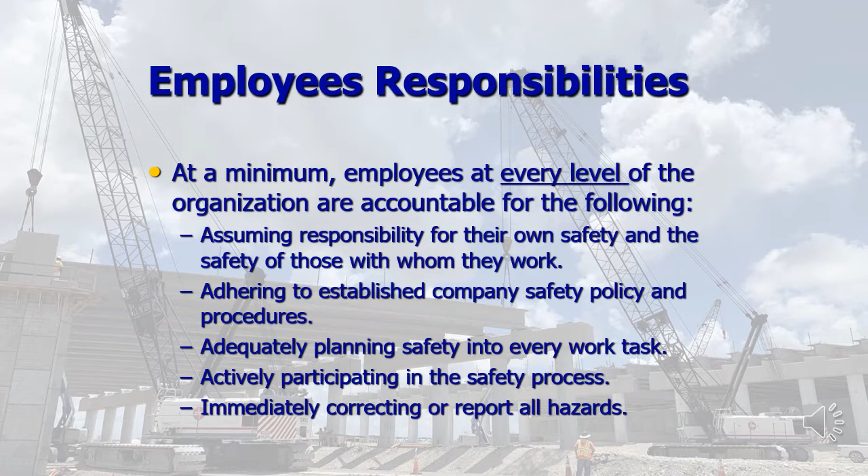More of your safety responsibilities. Number one, who is most responsible for your safety? You are. And how do you achieve this? By knowing and following all of the safety rules, wearing the proper PPE required for a task, and being prepared to come to work each day, both mentally and physically.

Who else are you responsible for? Can you come up with any other reasons? You are also responsible for your coworkers' safety. Stop unsafe acts while they are happening. Don't wait. If you see something, say something. Remind people to comply with safety rules. Be another set of eyes and ears to help prevent an accident.

You must report any injury or illness, no matter how minor, immediately to your supervisor. Your report will also help us to identify and correct hazards that will prevent injuries to others in the future as well.

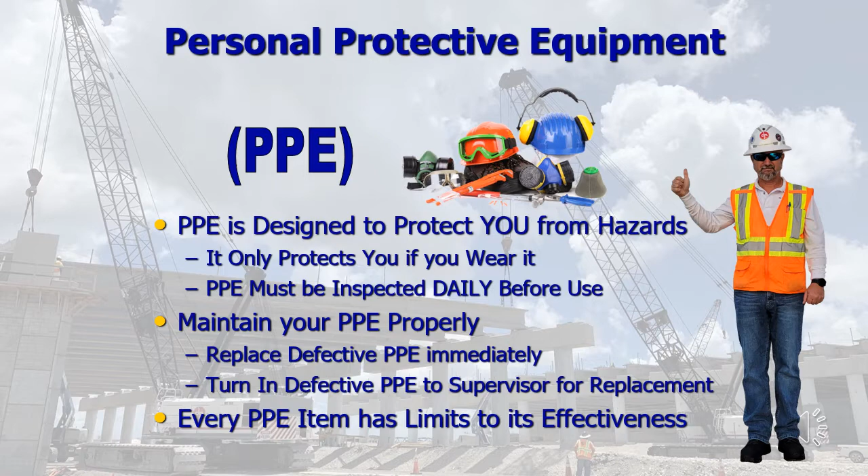Personal protective equipment, or PPE, is designed to protect you from hazards. It only protects you if you wear it. It must be inspected daily before each use, and it must be maintained properly. Replace defective PPE immediately. Turn in that defective PPE to your supervisor for a replacement. Every PPE item has a limit to its effectiveness.

Hard hats must be worn properly. The Asphalt Group logo should face the front. The inner suspension should be in place. The ratchet should work perfectly. No hats should be worn underneath, and do not paint or draw on the outer shell. Inspect your hard hat daily. Check it for cracks or defects. Make sure the suspension functions correctly. If it needs to be replaced, talk to your supervisor.

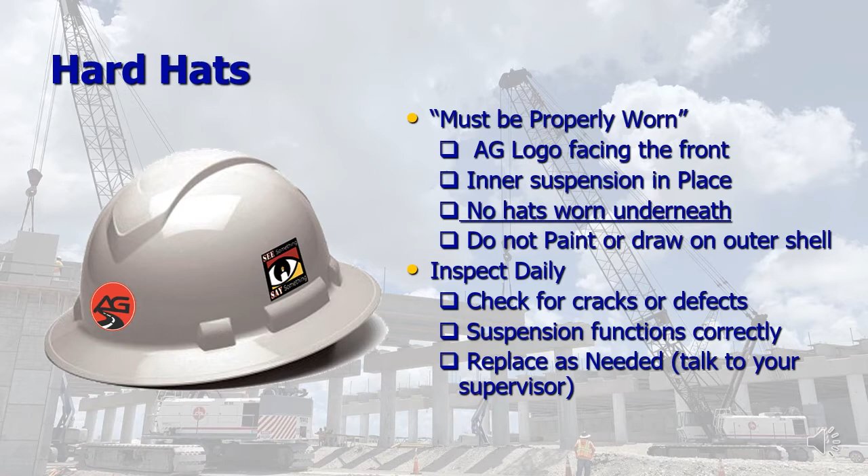Vests are required on all projects and job sites. Class 2 retroreflective clothing is required by all project employees and subcontractors. Class 2 shirts are also acceptable. A Class 3 vest is required for all personnel performing nighttime operations such as asphalt paving and MOT when working near traffic.

Inspect daily. Replace if worn out or if too dirty to be visible. Exchange your worn vest for a new one. This policy includes contractors that are working on the job sites as well.

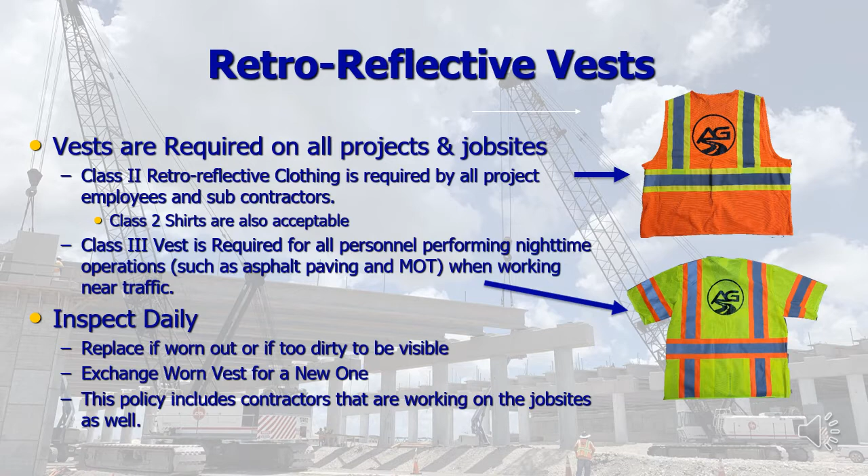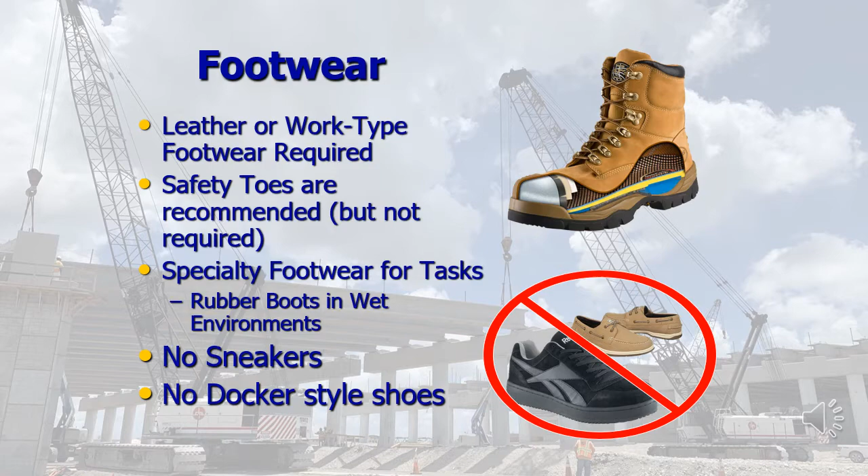Footwear: leather or work-type footwear is required at all times. Safety toes are recommended, but not required. Specialty footwear for tasks might be rubber boots, for example, in a wet environment. No sneakers or Docker-style shoes are allowed by our employees or by subcontractors. Only leather or work-type footwear should be used at any time while on the project.

Eye protection: your safety glasses must meet ANSI Z87.1 standards. That standard is for impact protection. These glasses provide protection against flying objects, light radiation, and dust. Face shields are required for all grinding, welding, machining, cutting, chipping, and spray operations, or any other specific activity where there is an increased risk for eye and/or face injury. You may also need shade 4 or shade 5 cutting glasses or goggles when cutting with an acetylene torch rig.

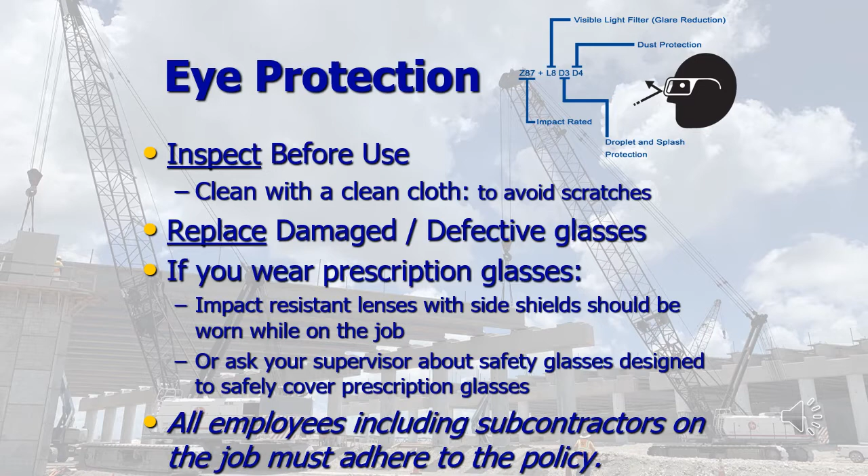Hand protection. Your hands are your most valuable asset. It is of the utmost importance to protect that asset on the job. Basic leather-palmed work gloves or rubber-palmed gloves will be provided to every employee when hired.

Employees will be provided additional protective gloves based on the identified hazards as needed. Those gloves would be the type like anti-vibration while chipping, cut-resistant while using knives, chemical-resistant while using chemicals, or welding gloves when welding or cutting with an oxyacetylene torch.

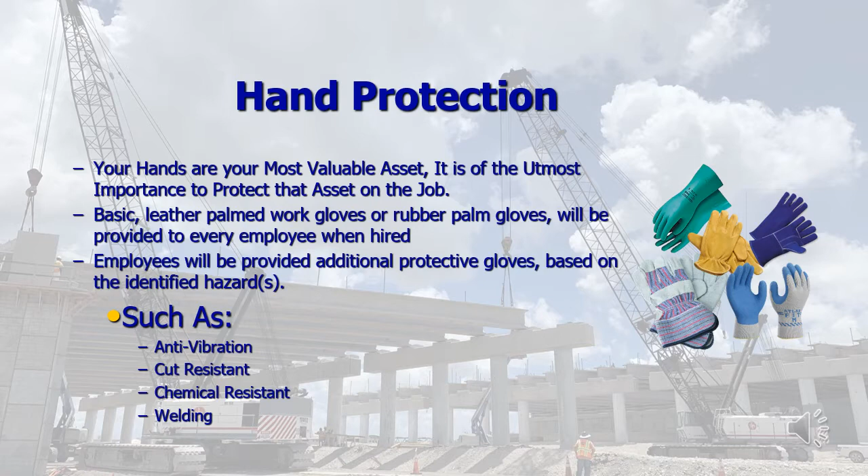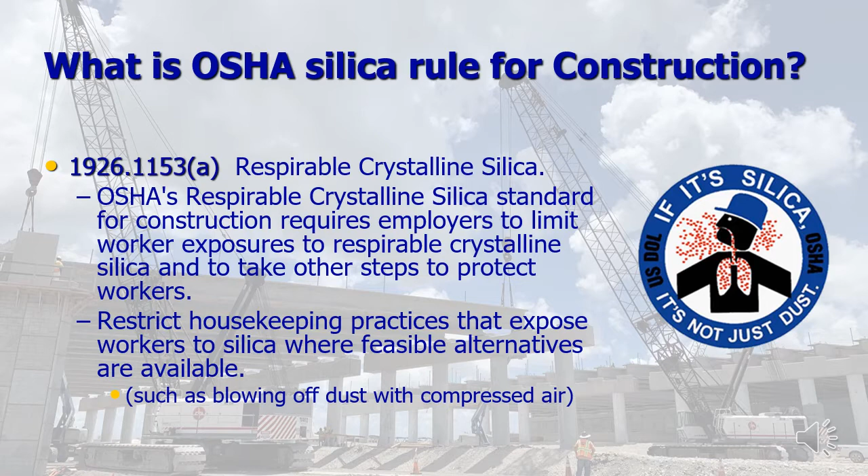What is OSHA's silica rule for construction? 1926.1153A talks about construction requiring employers to limit worker exposures to respirable crystalline silica and to take other steps to protect workers. It helps to restrict housekeeping practices that expose workers to silica where feasible alternatives are available, such as blowing off dust with compressed air.

What is silica? Silica is one of the most common minerals in the Earth's crust. Glass, beach sand, silicone, and granite are all silica materials. There are two forms of silica, crystalline and non-crystalline. Crystalline silica is a bigger worry for the health of our lungs. When we talk about silica exposure, we are talking about crystalline silica or quartz.

Construction workers could be exposed to silica when cutting, grinding, drilling, sanding, mixing, or demolishing materials containing silica. The size of the airborne particles determines the amount of the risk. Smaller particles can be inhaled deep into the lungs where they can cause damage. Larger particles such as beach sand are not as great a concern because they are too large to inhale.

What happens if you are exposed to too much silica? Breathing silica deep into the lungs can cause silicosis. With silicosis, silica particles lodge in the lung tissue, causing scarring. The lungs become less flexible, making it difficult to breathe and do work hard. Once silicosis develops, the damage is permanent and there is no recovery.

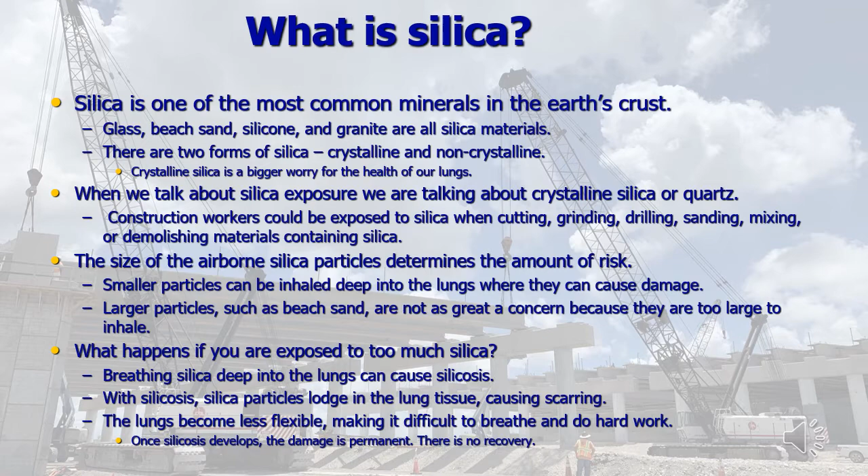How do we control exposure? Overall, this OSHA rule calls for employers to reduce employee exposure to silica and dictates the procedures employers should follow, such as engineering controls, using dust suppression, water truck use on the roadways, using water while cutting asphalt or concrete, and administrative controls, which is training in silica and training in the exposure levels.

Respirators are only used as a last resort. They should never be used instead of dust control. Voluntary usage is an option for nuisance dust as well, and it requires no medical training or fit testing.

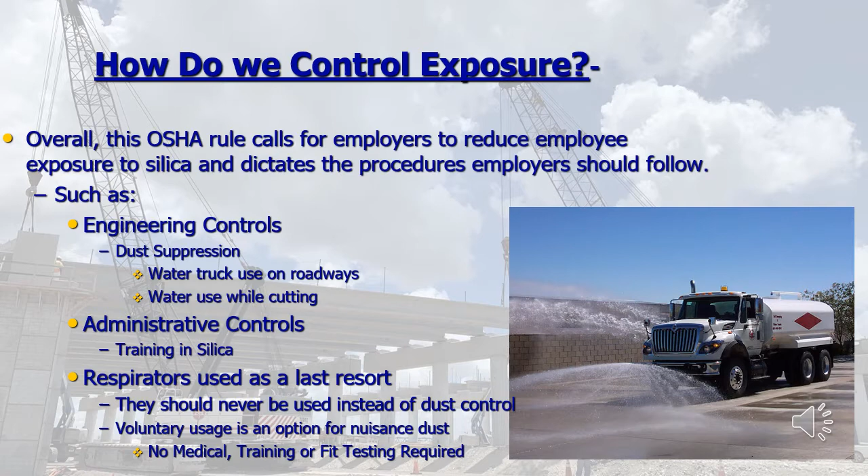Examples of tasks that would require respiratory protection measures would be cutting asphalt or concrete with a handheld or walk-behind saw, operating a broom or broom tractor without a cab, sandblasting operations, and baghouse and drum maintenance in asphalt plants. Remember, water suppression is key.

Company policy requires utilizing water to keep the dust levels to a minimum, therefore not requiring a respirator. Remember, no dust equals no need for a respirator. This one slide says it all.

Hearing protection. Always use earplugs or earmuffs when working around noisy equipment or tools in the field. Insert them properly. Keep them clean. Never insert earplugs into your ears with dirty fingers. Use caution when wearing hearing protection around traffic or equipment because you want to be able to hear the things around you. And always replace dirty or worn hearing protection.

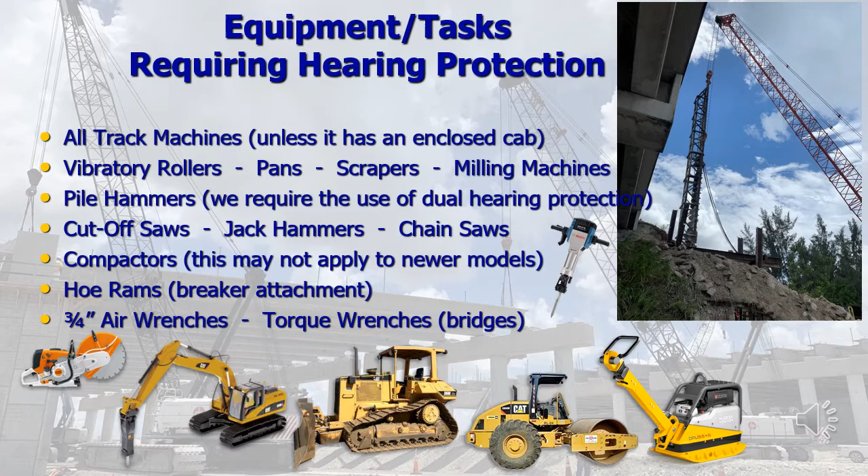Let's look at some examples of tasks that require hearing protection. All tracked machines, unless it has an enclosed cab. Vibratory rollers, pans, scrapers, milling machines. Pile hammers, where we require the use of dual hearing protection, meaning that you need both earplugs and ear muffs. Cutoff saws, jackhammers, chainsaws, compactors, hoe rams, otherwise known as the breaker attachments, 3/4 inch air wrenches or torque wrenches that are used sometimes on steel bridges. All of these things require hearing protection.

Some other miscellaneous PPE or personal protective equipment would be chainsaw chaps whenever using a chainsaw, which are designed to bind up the chainsaw in the event that the chainsaw blade made contact with the chainsaw chaps. Toe caps, if the visitors were to be exposed to any toe hazards while on the job site, for example. Welding sleeves when welding, or the green welding shirt.

Make sure you use the PPE properly and inspect it before each use. How are your PPE requirements communicated to you every day? By the daily job plan or the safety meeting that you have with your crew every morning.

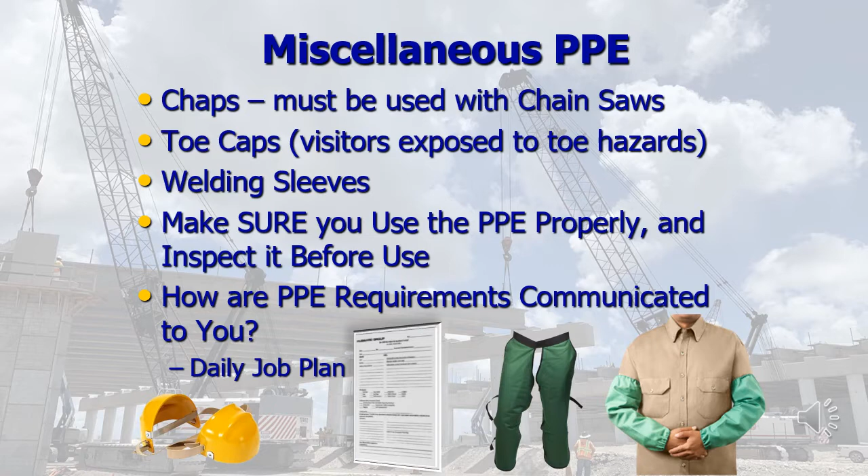Do's and don'ts of operating hand and power tools. Do inspect tools and equipment before each use. Check extension cords for any cuts, broken ground prongs, or exposed wires. Keep tools clean and stored properly. Always use the right tool for the job. Wear the correct PPE for the tool as required per policy.

Don't ever use defective tools or equipment. Don't leave power cords lying in water. Don't set circular saw blades down on their own power cords. You'd be surprised how many others have done this in the past. Don't operate tools or equipment unless you are experienced or have been trained in their use.

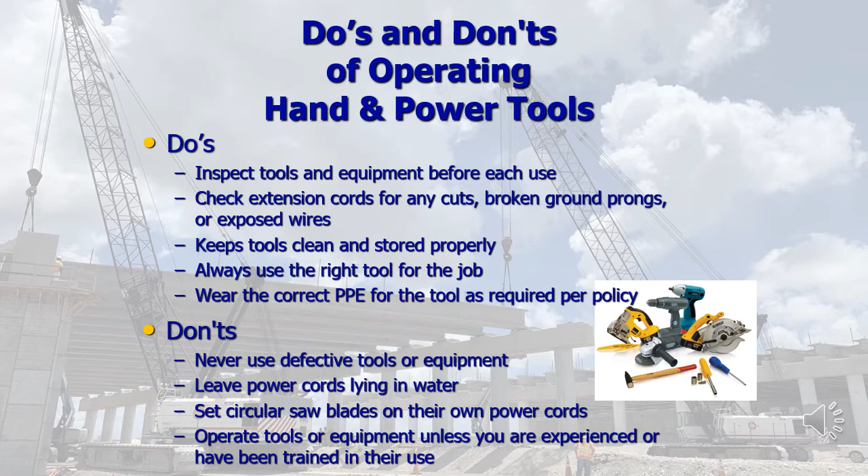Addressing safety concerns. If you feel a task or procedure is unsafe, the first thing you need to do is speak to your supervisor. If the issue is not resolved, bring the issue to the superintendent. If the issue remains unresolved still, contact your project manager immediately. If no action occurs, contact safety. You got to speak up for safety. Remember, if you see something, you must say something.

Near misses. What is a near miss? It's an unplanned event that did not result in an injury, illness, or damage, but had the potential to do so. Only a fortunate break in the chain of events prevented an injury, fatality, or damage. A faulty process or management system is typically the root cause for the increased risk that leads to the near miss and should be the focus of improvement.

Other familiar terms for these events: close call, narrow escape, near collision, near hit. Remember, report all near misses to your supervisor every day. What you see, what almost happened, could prevent someone from getting hurt in the future.

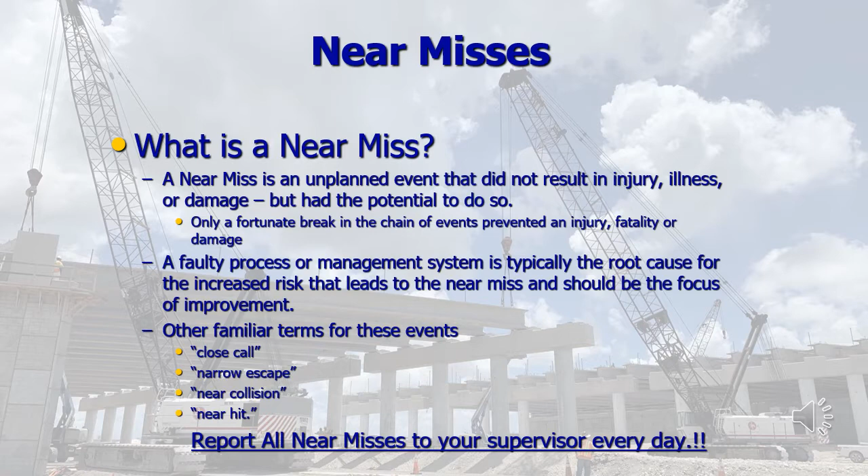Cell phones and texting. Use of a cellular telephone during working hours is prohibited. Texting is also prohibited.

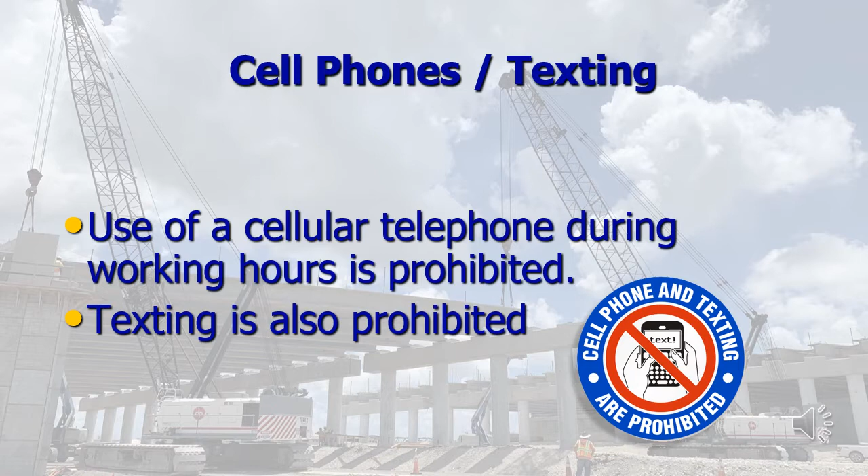Injuries in the workplace. Some of the top 5 injured body parts are knees, hands, back, shoulders, head. Back injuries coming in number 1.

Some of the top 5 events for causing injuries or illness is contact with objects, slips, trips, and falls, lifting, exposure to harmful substances, and transportation. Top 5 sources of injuries or illness: parts and materials, motion or position, floors, walkways, materials, hand tools, and machinery.

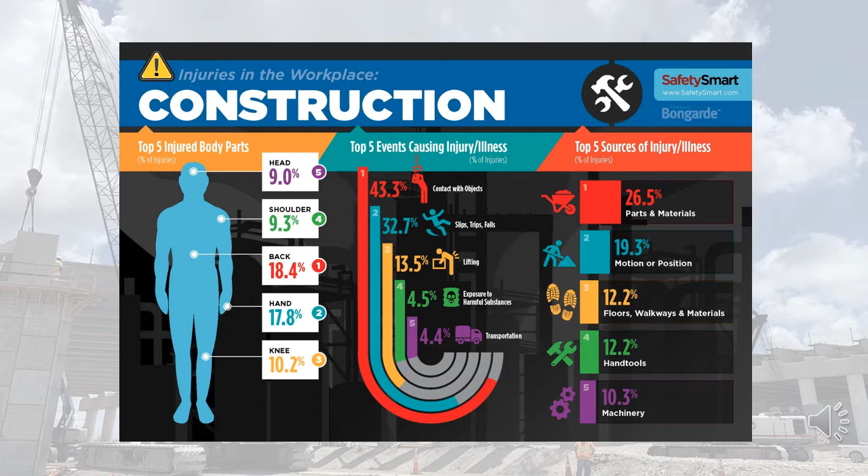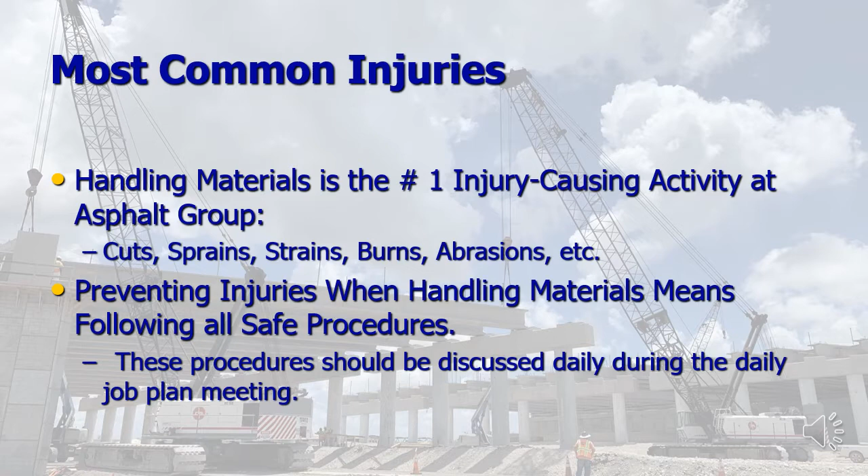Most common injuries. Handling materials is the #1 injury-causing activity at Asphalt Group. Things like cuts, sprains, strains, burns, abrasions, etc. Preventing injuries when handling materials means following all safe procedures. These procedures should be discussed daily during the daily job plan meeting.

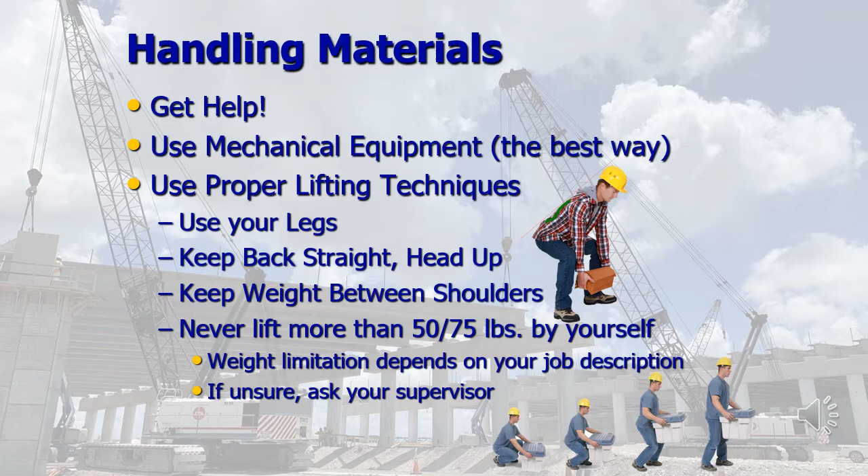Handling materials. Number 1, get help. Use mechanical equipment. That's always the best way. If you do have to lift, use proper lifting techniques. Use your legs. Keep your back straight, head up. Keep the weight between your shoulders. Never lift more than 50 to 75 pounds by yourself. Remember, the weight limitation depends on your job description, and if you're unsure, simply ask your supervisor.

Equipment handling safety. The physical work area must be safe first and foremost. Keep it clear, marked, and unobstructed. Workers must be trained, evaluated, and licensed. Training must be equipment specific and site specific. For example, forklift. The operator must be licensed to operate that forklift or telehandler. The equipment must be safe to operate. Inspect the equipment thoroughly before each use.

Removal from service when repairs are needed. Never operate defective or unsafe equipment. The foreman should always contact the equipment shop to verify repair schedule whenever anything is found to be a safety hazard.

How about these for proper lifting techniques? Do you see anything wrong in any of these pictures? Let's try to make sure we're not on the next list.

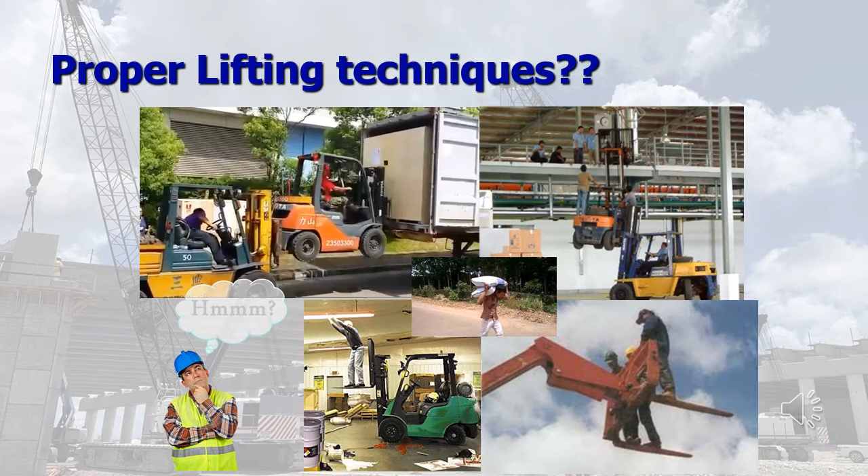Slips, trips, and falls. They are the #2 cause of injuries within our group. These injuries are prevented simply by good housekeeping. Believe me, good housekeeping on any project is the leading indicator of a safe project. Always keep the walkways clear, place extension cords, wood, ladders, anything that could potentially be a slip, trip, or fall hazard, just keep it out of the way.

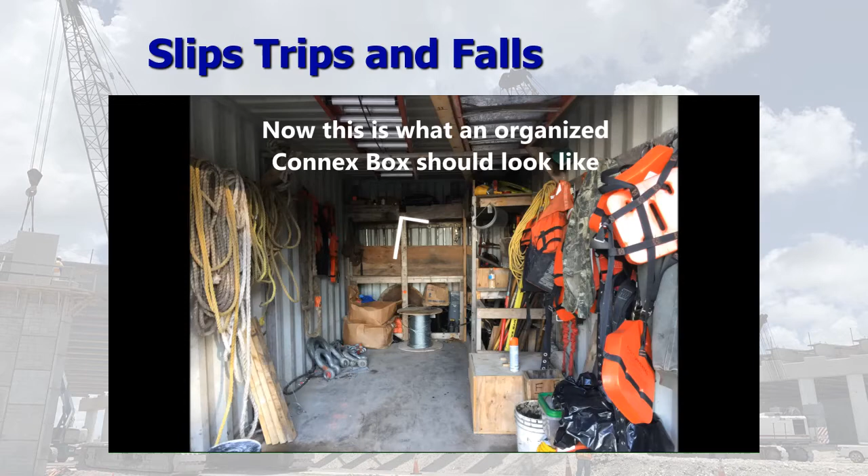Backing accidents. Backing accidents are very preventable, both in the vehicle and on the ground. The best way to work around that is parking for first move forward. If the first motion you move is forward, then you're less likely to ever worry about someone being behind you. Back into parking spaces to make it easier and safer when you leave. Pull through parking spaces whenever possible. Pull through to make your first move forward. Stay clear of any backing equipment or vehicles if not needed whenever possible.

Use a spotter. If you have more than one occupant in the vehicle, you have a spotter available to you. Or if you're going to have to back up more than 100 feet in an enclosed area, get a spotter.

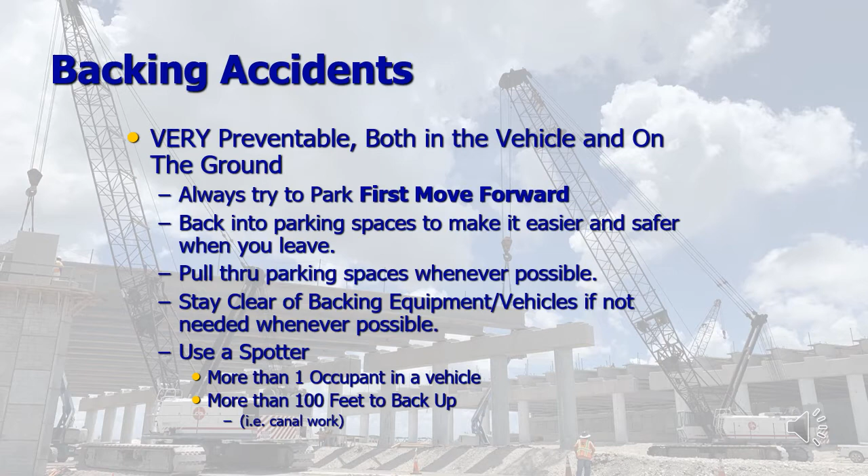Let's talk about spotter training. The position of the spotter is the first thing.

If you're exposed to traffic, the spotter should be placed on the passenger side of the vehicle or equipment. No traffic and no other crush hazards, the spotter can be placed on the driver's side. Never stand behind a piece of equipment or vehicle in a crush zone or next to a raised bed of a dump truck. Always leave yourself an out to ensure a clear path to a safe zone.

Communication and signaling is always number 1. Ensure you and the person you are spotting agree to the signals prior to spotting and moving backwards. Make sure the driver and operator know if they lose sight of each other, they are to stop immediately.

One thing you're always going to find on a construction project are workers on foot. Believe me, this is an unforgiving environment for workers on foot. Working safely around equipment includes staying out of the EOZ, or equipment operating zone, unless your job demands it.

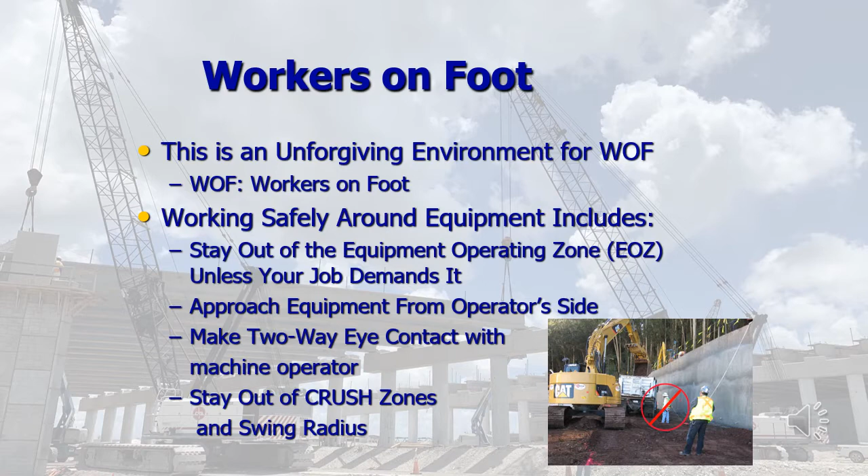If you do have to, approach the equipment from the operator's side, make two-way eye contact with the machine operator. Before you ever approach any piece of equipment, always get the right to enter the equipment operating zone. Stay out of any crush zones and swing radiuses, as those are the worst and will have the most potential for an injury.

Workers on foot have a lot of struck-by type traffic hazards. During any mainline operations, pay close attention to your proximity to live traffic. Never leave your back to live traffic.

Never allow tools such as shovels or asphalt rakes to extend beyond the closed lane and venture into live traffic, especially beyond the cones or barrels. Always watch out for your fellow workers and alert them if they get too close.

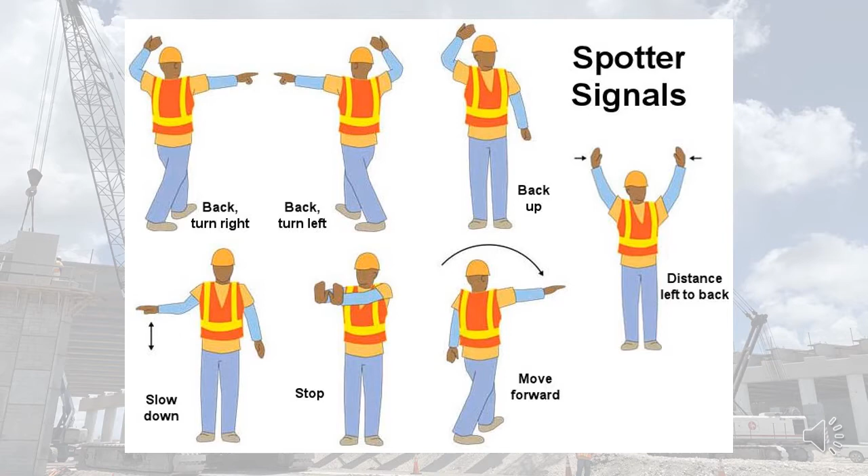As we've said before, always keep out of the swing radius at all times. Remember, excavators, cranes, aerial lifts, anything that has the ability for rotation has the ability for something to rotate and hit someone else. Always stay out of that swing radius at all times, and always make sure you get clearance to enter from the operator before you enter.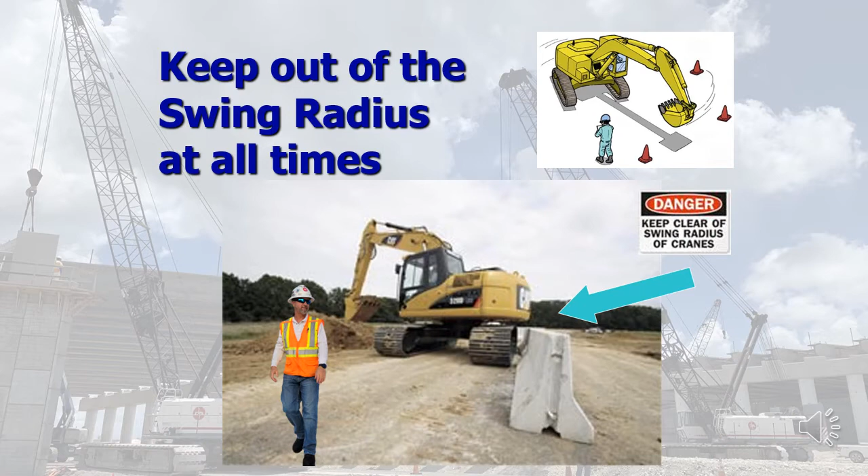Fall protection. The leading cause of death in the construction industry is from falls from height. OSHA has a falls emphasis program because of this. For unprotected elevations above 6 feet, we could use option 1.

Fall arrest system: this protects the worker who is already in the process of falling by stopping the fall after it has happened. This is by using a body harness, a dual leg 6-foot lanyard for 100% tie off. A horizontal cable lifeline system could be used, or a retractable lanyard, otherwise known as a yo-yo.

You could also use option 2, fall restraint system. This protects the worker from accessing the potential hazard. Things such as guardrails and handrails are good for this. Then you have warning lines. These warning lines let the worker know they are too close to the edge and must not proceed further. Do not ever expose yourself to the potential of a fall over 6 feet.

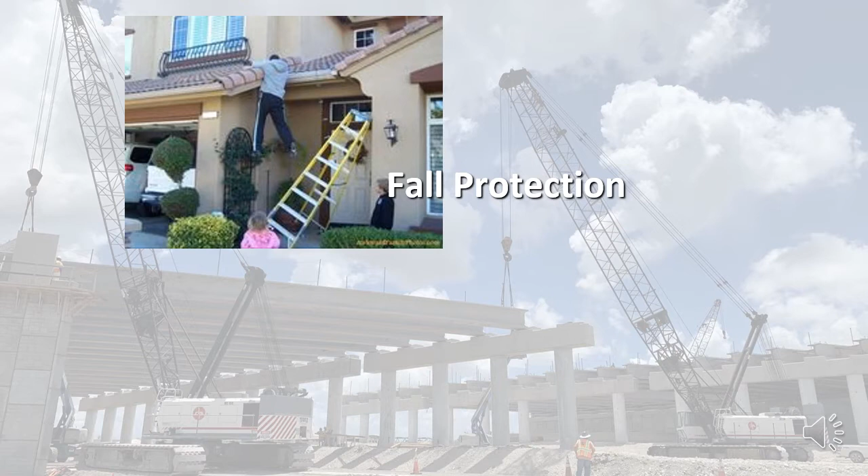As you can see in these two photos, the leading cause of falls in the home is from a ladder. Always make sure when you're working at home, be as safe at home as you are at work.

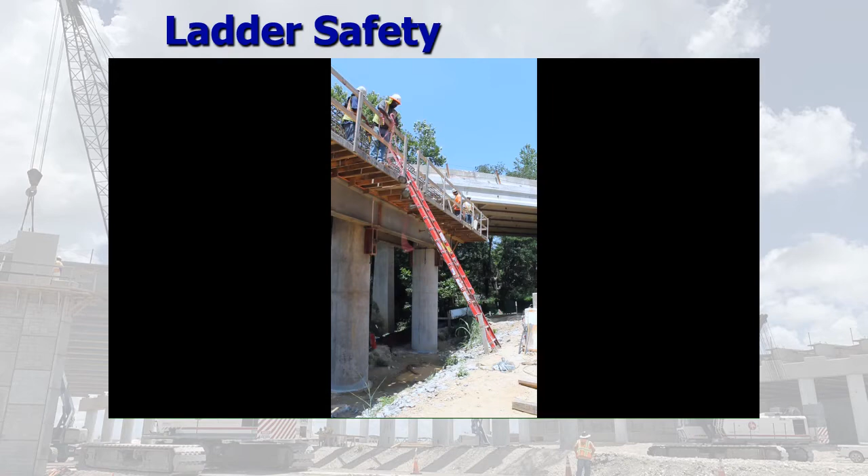Lockout tagout. The purpose of lockout tagout is to prevent accidental or inadvertent equipment startup or energy release while performing maintenance, which could result in injury or death.

Each asphalt plant, for example, must have an energy control plan or a lockout tagout manual. It's important to lock out the correct piece of equipment, and to do so, you need a lockout manual that tells you exactly which pieces of equipment to lock out and how many locks you'll need to make sure that you're safe performing the maintenance that you need to perform.

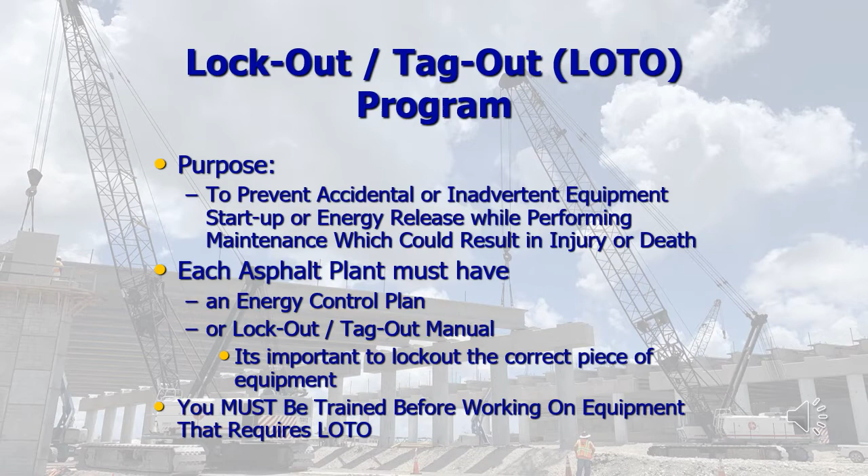You must be trained before working on equipment that requires lockout tagout. Vehicles and equipment also utilize lockout tagout.

On a piece of equipment or a vehicle, you simply take the do not operate tag, write the purpose for the lockout tagout, sign it, and attach it to the steering wheel or the area where the vehicle would normally be started. Electrical components and equipment also have specialty designed lockout tagouts for each type, such as breakers and control panels.

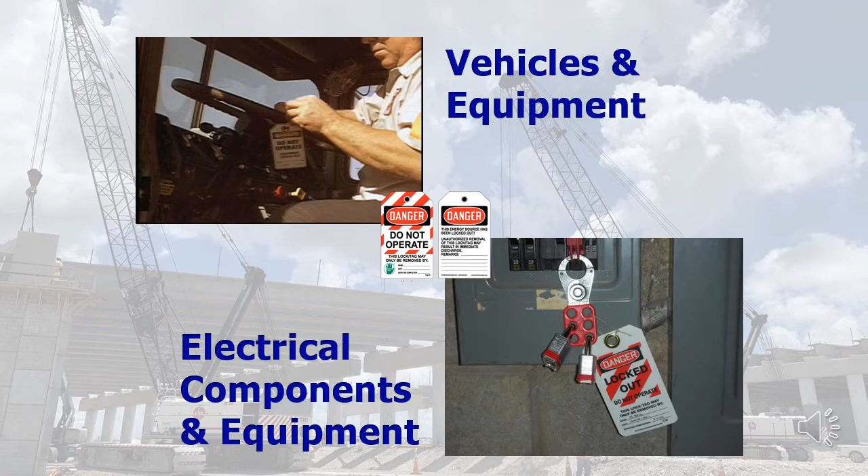Confined spaces. The OSHA definition of a confined space contains 3 main parts. Number 1, it has to be large enough for a worker to enter. It has to have limited or restricted means for entry or exit. And 3, it should not be designed for continuous occupancy.

Confined spaces can be considered a permit required confined space if they have all of the 3 above parts plus 1 or more of the following: a potential hazardous atmosphere, the potential for engulfment or suffocation, a layout that might trap a worker through converging walls or a sloped floor, or any other serious safety or health hazard.

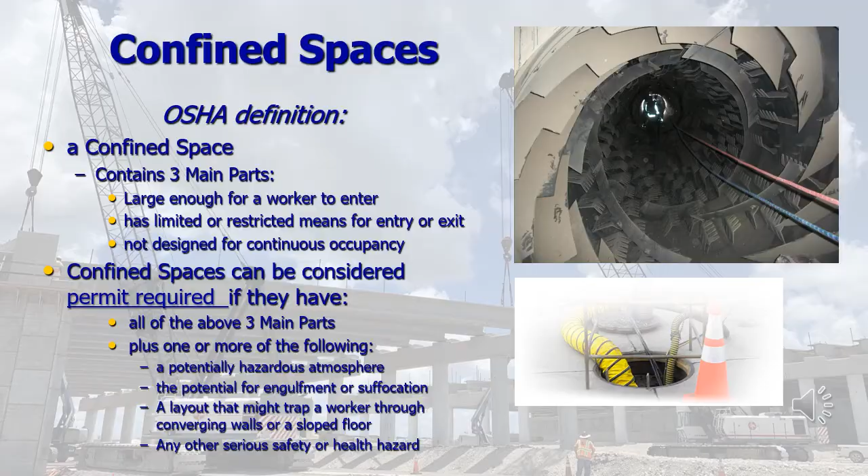Hazards in a confined space would be things like a hazardous atmosphere, where you have a less than 19.5% oxygen deficient environment, or harmful contaminants, flammable substances, hot substances like asphalt, tack, or prime in the asphalt plant, engulfment hazards like you'd find in hoppers or silos, or any physical hazards like head knockers, etc. Anything that could strike you in the head while you're working.

Confined space entry is by permit only. All participants must be properly trained. That means the entry supervisor, the confined space attendant, and all entrants must be properly trained and must review the permit prior to entry. Stay out of confined spaces until you're properly trained and a permit is issued and signed by all participants. After what we've just talked about, does this look like a permit required confined space? It certainly is.

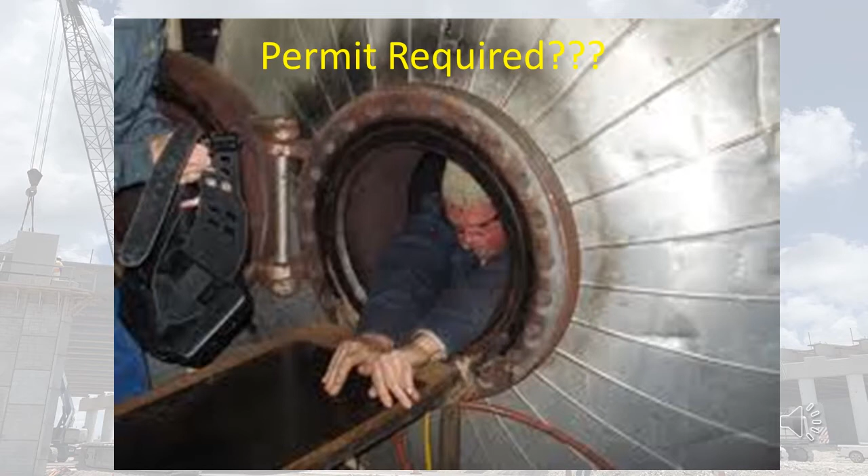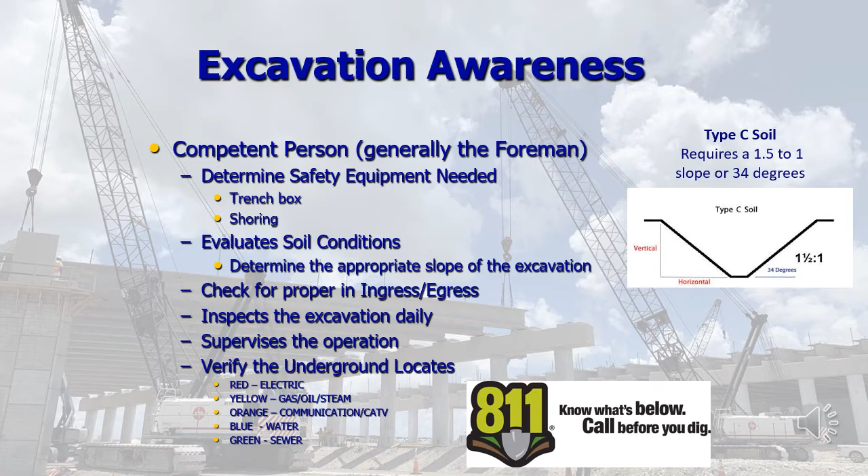Excavation awareness. Any excavation requires a competent person. That person is generally the foreman. Their job is to determine whether the safety equipment needed is there, such as a trench box, shoring. They have to evaluate the soil conditions to determine the appropriate slope of the excavation. For example, in Florida, we have type C soil. All excavations in Florida must be made to 1.5 to 1, or 34 degrees. Their job is to check for proper ingress and egress to the excavation, inspect the excavation daily, supervise the operation, and verify that any underground locates are done and checked to confirm that we know what's below before we dig.

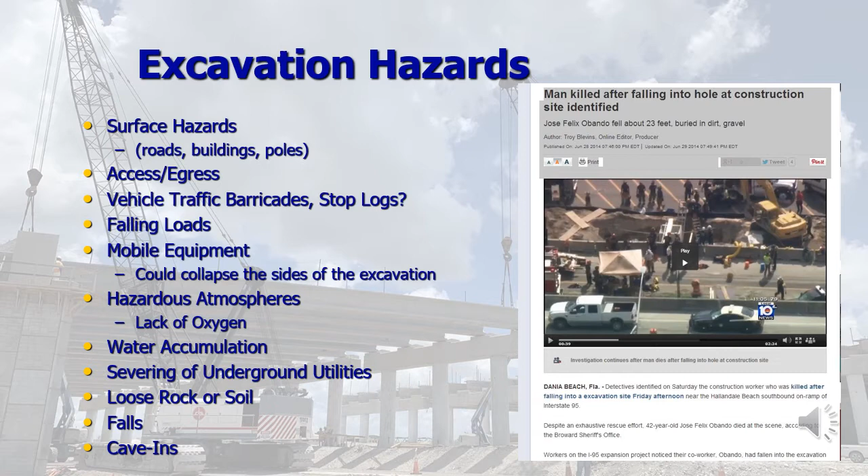Some other excavation hazards would be surface hazards like roads, buildings, poles, again with access and egress or entrance and exit to it. Vehicle traffic barricades, any falling loads, mobile equipment working in the area that could collapse the sides of the excavation, any hazardous atmospheres inside the excavation, like a lack of oxygen, water accumulation in the excavation, severing of underground utilities while digging the excavation, and loose rock or soil, any falls into the excavation which could be prevented by handrails, and any cave-ins while digging or in the excavation.

Soil classifications, protective systems, and sloping. Employees who work in excavations must be trained in the 4 soil classifications: stable rock, type A, type B, and type C soil. In general, stable rock is not common because we disturb it by excavating, leaving us with the following 3 soil types, A, B, and C, to gauge our excavations. Type C soil is the least stable type of all soils, and that's the soil that we find generally in Florida. Type C includes granular soils in which particles don't stick together, and cohesive soils with a low, unconfined compressive strength.

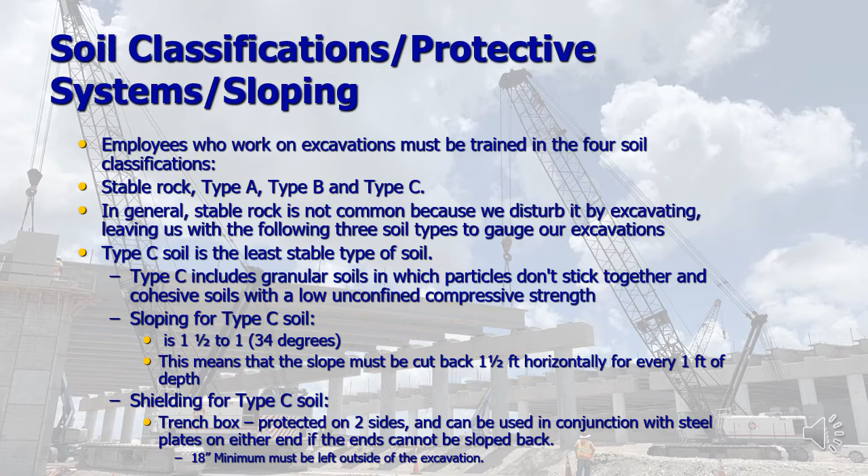All that just means that the soil does not stick together very well because it's mainly comprised of sand. Sloping for type C soil is 1.5 to 1, or 34 degrees. This means that the slope must be cut back 1.5 feet horizontally for every 1 foot of depth. Shielding for type C soil typically consists of a trench box protected on 2 sides and can be used in conjunction with steel plates on either end if the ends cannot be sloped back. But remember, those trench boxes must have 18 inches of reveal outside of the excavation to prevent material from falling inside.

Spoils, access, and egress. Do not place spoils or excavated material within 2 feet from the edge of the excavation. You must provide ladders, ramps, or stairs for excavations 4 feet in depth or more. Areas of access egress must be within 25 feet of the workers inside the excavation. A trench box must never exceed a maximum of 24 inches off the bottom of the excavation. And remember, the trench box is required for an excavation more than 5 feet in depth.

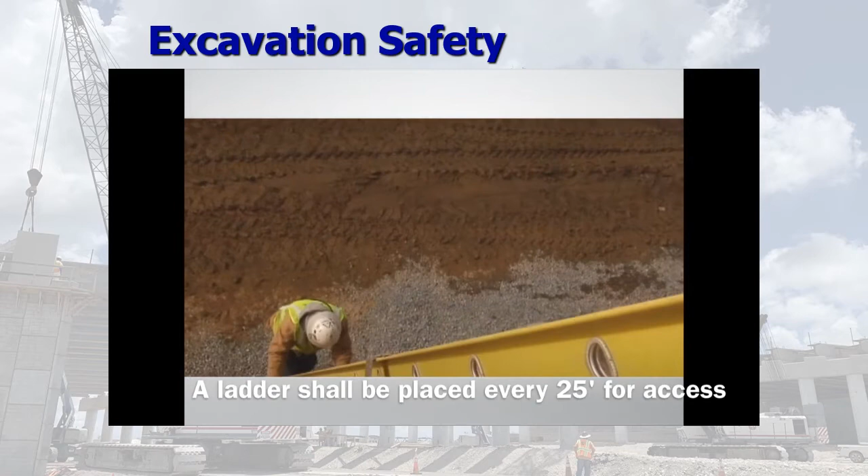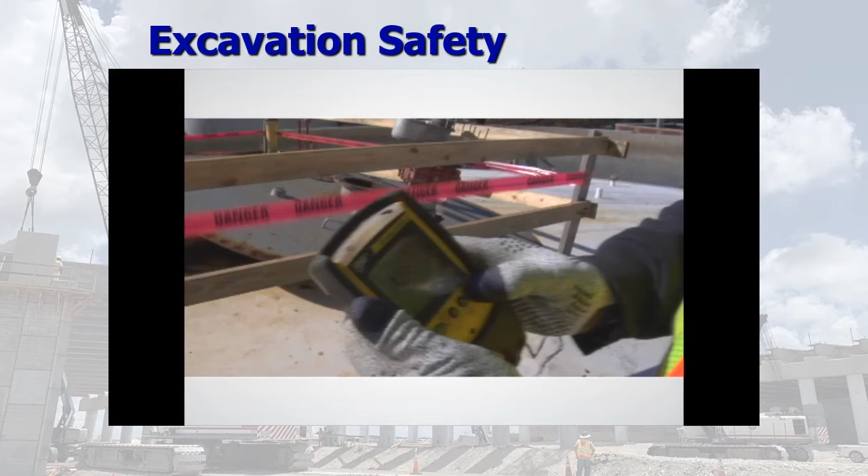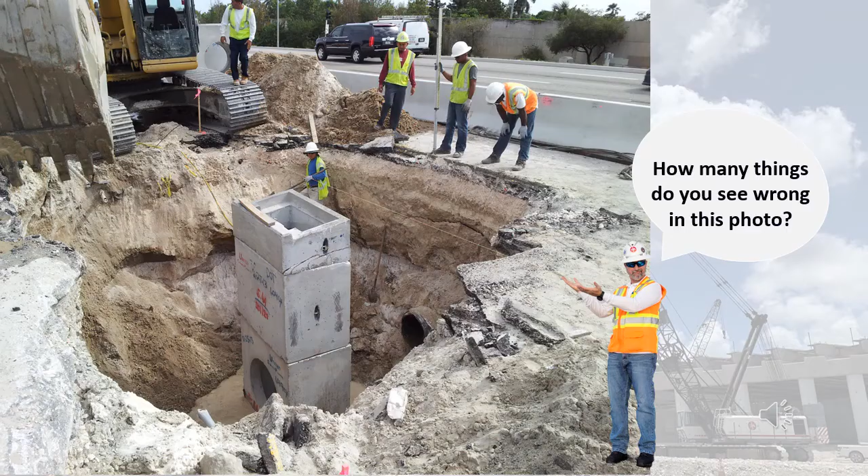Here you can see some examples of good excavation safety and bad excavation safety. How many things can you find wrong in this photo? Do you see anything as unsafe? Have a look at these excavations. Do they look unsafe?

The daily job plan is how your supervisor communicates your job assignments, any hazards to look for during the task, any PPE required, and the safe work procedures for each step of the task in order to stay safe. Use the daily job plan as a reference for what you have discussed. For it to be effective, you must participate in your daily job plan. You must sign the daily job plan every day, and never sign a blank form, just like you would never sign away a blank check.

Driving company vehicles. All drivers must be approved by the main office prior to operating a company vehicle, including using a personal vehicle for company business. We must ensure you have the proper license and endorsements for the vehicle you plan to drive: Motor Vehicle Class E, Commercial Driver's License CDL-A, CDL-B, plus any required endorsements like tanker or hazardous materials, all need to be checked along with your driving record before you're approved for driving.

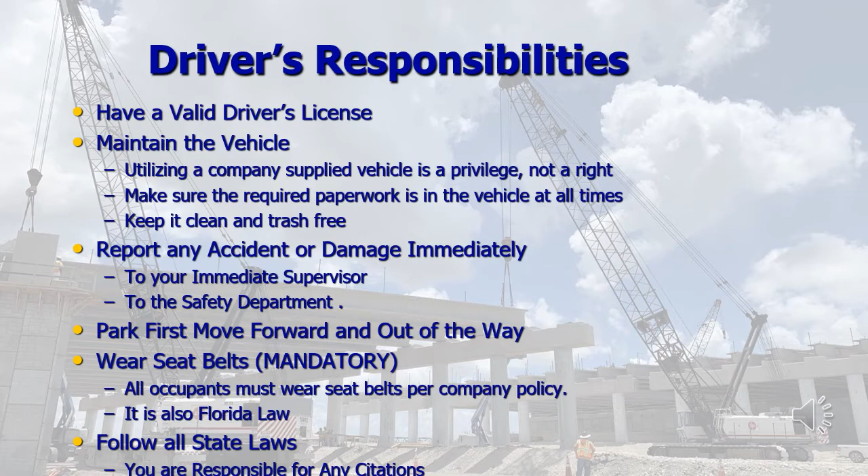Try to park first move forward and out of the way. Parking first move forward allows you to pull out rather than back out. Wear your seat belts, it's mandatory. It's Florida law and company policy. Company policy says all passengers, front and rear, must wear seat belts at all times. Follow all state laws, and you are responsible for any citations you receive while driving a company vehicle.

Riding in the bed of trucks. Riding in the bed of a pickup is not a recommended practice and should be avoided at all times. If personnel are transported within the job site, they should remain completely seated on the bed of the truck, not on the bedsides, tailgate, or toolbox.

Equipment-related accidents. Some safe behaviors for getting on and off of equipment: number 1, face the machine at all times. Always use 3 points of contact, 2 feet and 1 hand, or 2 hands and 1 foot. When operating heavy equipment, always inspect your equipment daily. Wear your seatbelt under the ROPS, or rollover protection system.

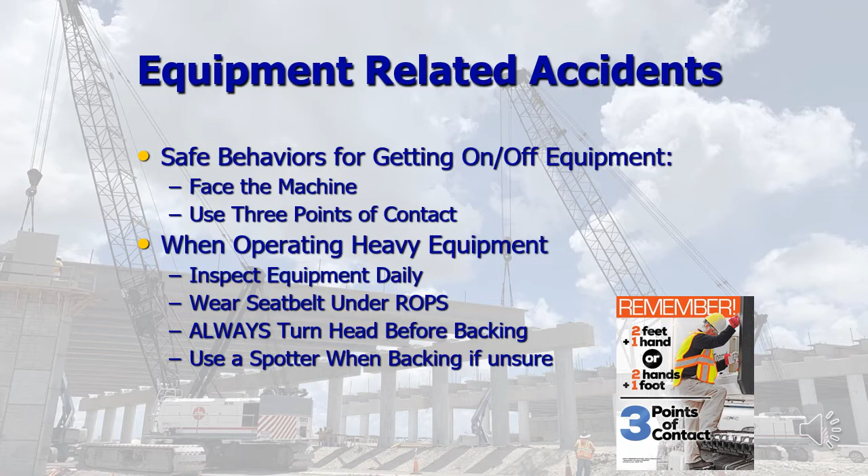Not only is it company policy, but it is Florida law to wear your seatbelt. Always turn your head before backing. And as we spoke of before, use a spotter when backing if you're unsure what's behind you or it's very restricted vision to the rear.

Operating mobile equipment. Operators must inspect their equipment daily. This is mandatory and critical to checking for defects. Both the de Moya Group and OSHA have these policies. Do not operate unsafe equipment. Report any safety defects on the equipment to your supervisor. Do not operate a piece of equipment that has any safety defects. Supervisors will contact the maintenance department, but only if you let them know.

Know the emergency procedures for your equipment if you ever come in contact with utility lines, a rollover, a fire, etc.

When operating mobile equipment, there should never be riders unless they are in an approved seat. Again, mount and dismount properly, always using 3 points of contact. Always exercise caution near overhead power lines. Heed the warning signs; the minimum clearance is 20 feet working, and never work over overhead power lines.

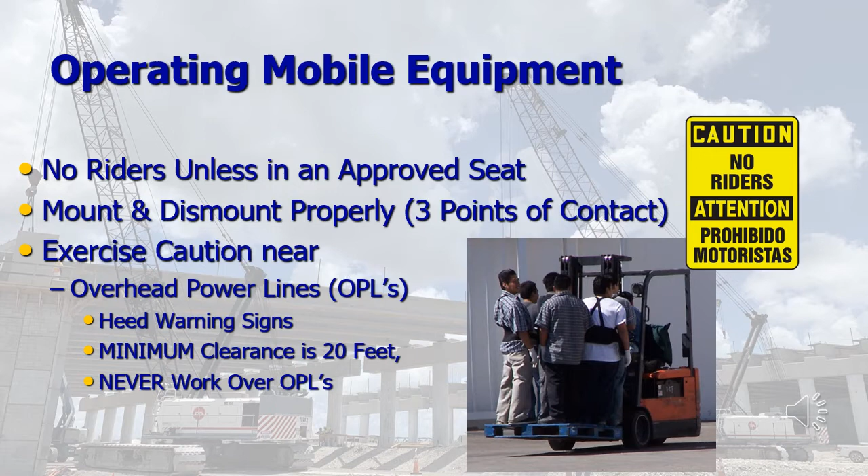Crane hand signals. Never signal a crane unless you have been properly trained in the use of crane hand signals. OSHA requires a crane signal person to be adequately trained in the use of hand signals. No training means no signaling.

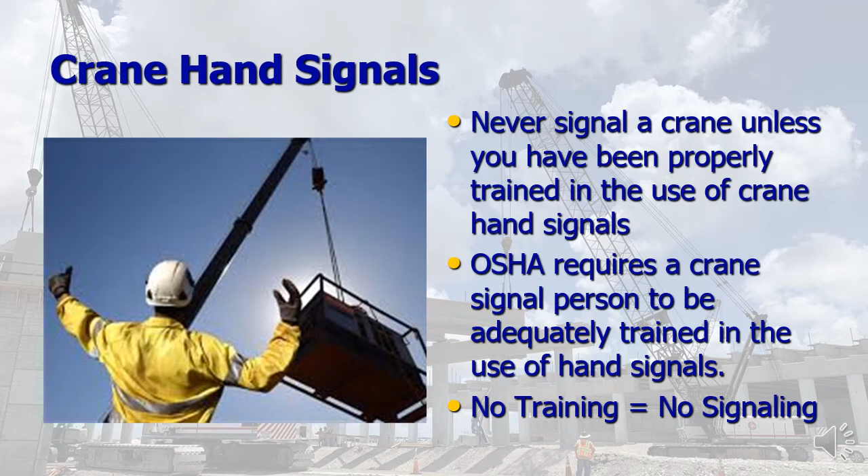Portable fire extinguishers. The types of fire extinguishers are as follows: Type A for general combustibles, Type B for flammable liquids, Type C for electrical fires, and Type D for metal fires. Always make sure the proper fire extinguisher is available for the fire potential you have.

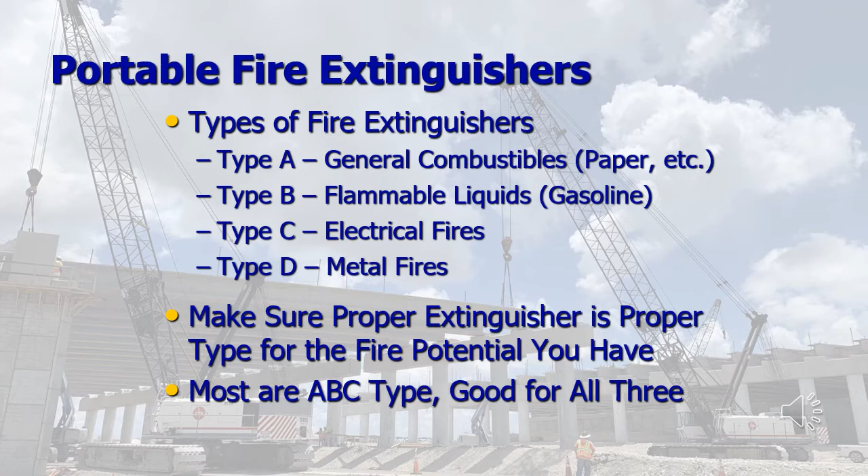When using a fire extinguisher, always remember the acronym PASS: P, pull the pin. A, aim for the base of the flames. S, squeeze the trigger. And S, sweep from side to side. But be warned, fire extinguishers are only for small, incipient stage fires. Be prepared to evacuate and call 911 if the fire extinguisher cannot control the fire.

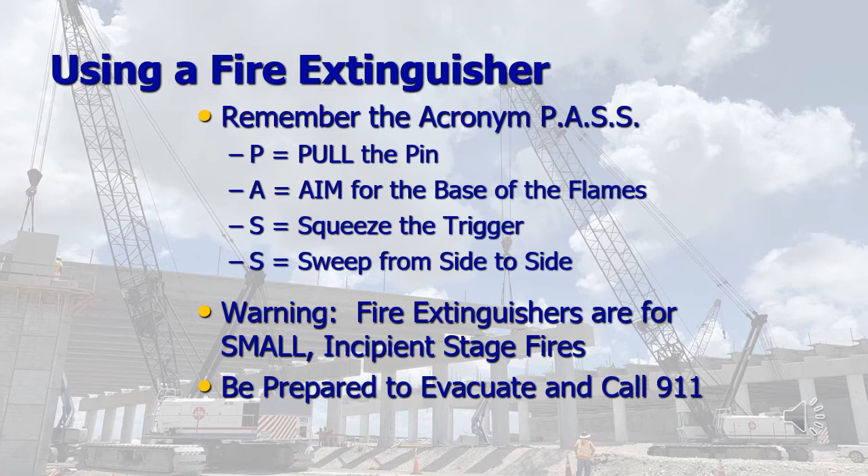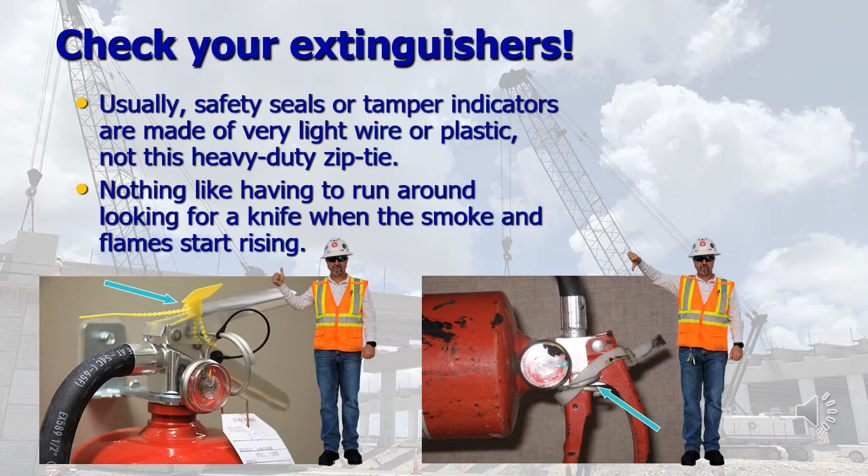Remember to always check your extinguishers. Usually safety seals or tamper indicators are made of very light wire or plastic, not the heavy-duty zip tie you see here in the picture on the right. There's nothing like having to run around looking for a knife when the smoke and flames start rising. Always check to make sure it's ready, charged, inspected, and ready to fight fires if necessary.

Now we need to talk a little bit about the Globally Harmonized System, GHS, and safety data sheets, formerly known as material safety data sheets. This is all found in the OSHA Hazard Communication Standard, 29 CFR 1910.1200.

OSHA replaced HAZCOM material data sheets with SDS. Every employee now has a right to know about every chemical product that they work with prior to ever working with it. So what exactly is an SDS? It's a safety data sheet.

It lists the PPE required, the hazards it has, exposure limits, storage, health risks, and any other information about a chemical. Where can you find the SDS books? SDS books are typically located at a job site, but all SDS for anything is available online and within seconds by using a portable phone or a computer.

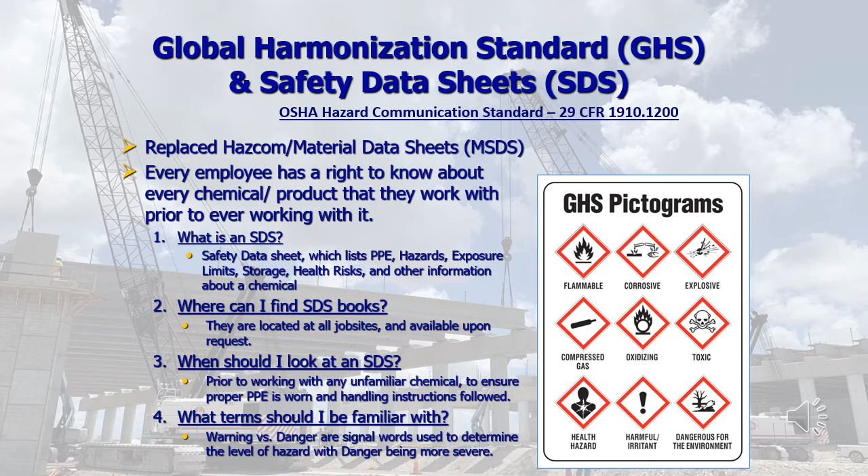When should you look for an SDS? Prior to working with any unfamiliar chemical or something that you don't know whether you could be allergic to, you use it to ensure proper PPE is worn and handling instructions are followed. What terms should you be familiar with? Warning versus danger are signal words used to determine the level of hazard, with danger being more severe.

What do I need to do if handling a chemical? The first thing is refer to the SDS for the hazards, PPE, storage, and first aid treatment prior to handling. Then ensure the container is labeled with the name of the chemical as well as the hazards. You can see the GHS label elements in the picture to the right. Notify your supervisor if you're unsure of handling instructions or the need for additional PPE.

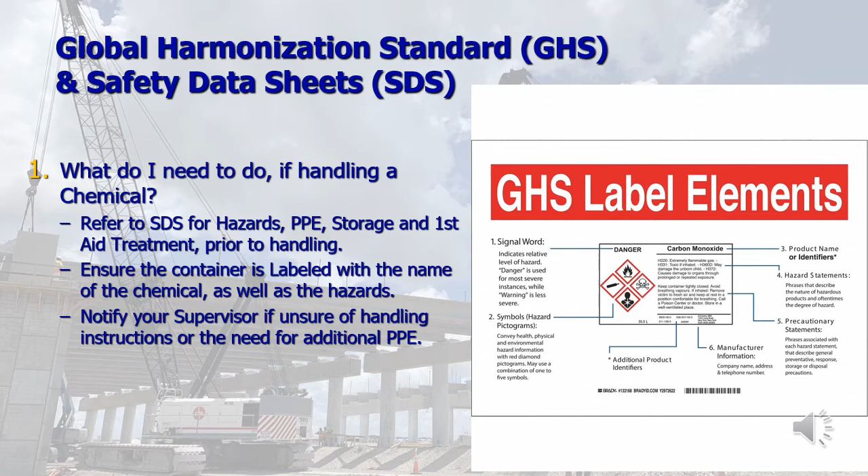So what's a safety can? It just means an approved closed container of not more than 5 gallons, having a flash-arresting screen, spring-closing lid, and spout cover, and so designed that it will safely relieve internal pressure when subjected to fire exposure. If you have any more questions about GHS, OSHA has a web page, or you can contact your supervisor or the safety manager for any additional information required.

Some of the things to worry about in the hot Florida sun is sunburn, heat rash and cramps, heat exhaustion, heat stress. These are all things that we need to talk about every morning in our daily job plan. Wearing an SPF 30 or higher sun protection and limiting our sun exposure by wearing long sleeves, neck protection, face protection, those are all some of the preventive things we can do on a daily basis.

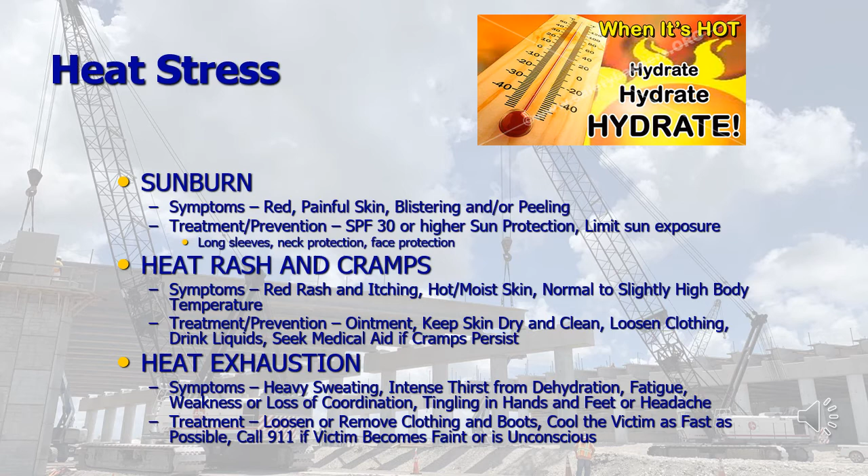The worst heat-related illness is heat stroke. Some of the early symptoms are high body temperature, hot, red, or flushed dry skin, headache, dizziness, confusion. Some of the advanced symptoms: seizure, convulsions, loss of consciousness, no detectable pulse. Some of the treatments would be to lower the victim's body temperature and do not give liquids to an unconscious victim, and do not force them to drink too many liquids too quickly.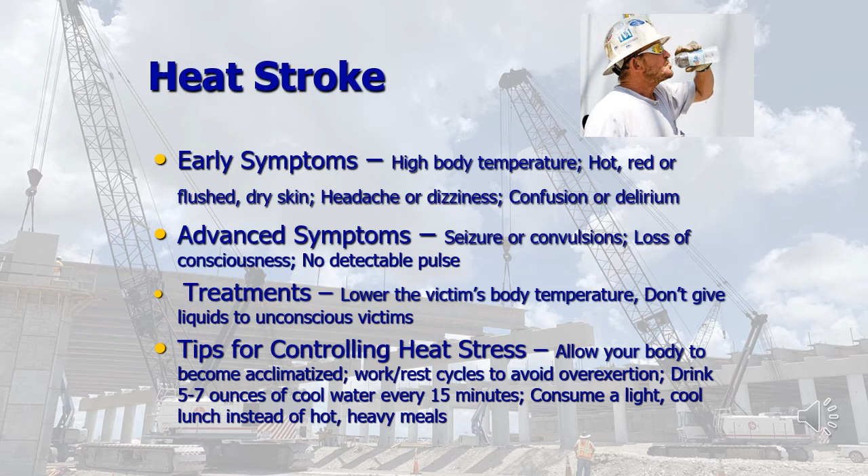Some tips for controlling heat stress: allow your body to become acclimatized, especially if you're coming from the north and coming down to work during the summer months. Always make sure you pace work and rest, and avoid overexertion as much as possible. Drink 5 to 7 ounces of cool water every 15 minutes. Consume a light, cool lunch instead of hot, heavy meals. These are all some of the tips to prevent heat stroke.

Water keeps your energy up, weight down, muscle strong, joint supple, digestive system smooth, and your whole system in physical balance.

Horseplay can cause injuries or accidents. Just say no to horseplay on the job. No running, no bullying, no chasing, pushing, goofing off, practical jokes. Remember, you need to respect and look out for your coworkers' safety.

Most of all, do not forget to respect all heavy equipment at all times. Always be aware of the surrounding traffic at all times. Follow the safe behaviors for each assigned task that you talk about every day in your daily job plan meeting. Attend that daily job plan meeting and be to work on time. If you're in a vehicle or equipment, always wear your seatbelt. It's our policy, it's Florida law, and they do save lives.

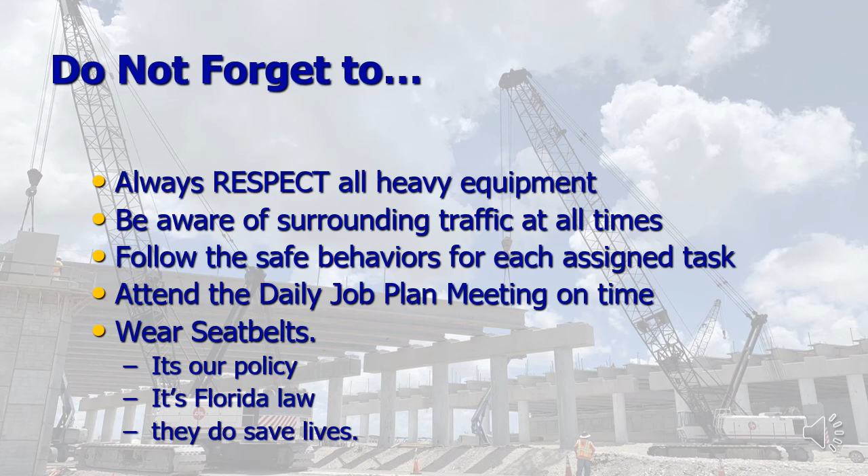The Asphalt Group's continued success depends upon our ability to remain both productive and safe at the same time, day in and day out. We must always look out for ourselves and our coworkers and expect the unexpected. Through observance and encouragement of our safety policies, we assist in protecting the overall well-being of our employees, clients, subcontractors, communities, and the company. Our employees are our most valuable resource.

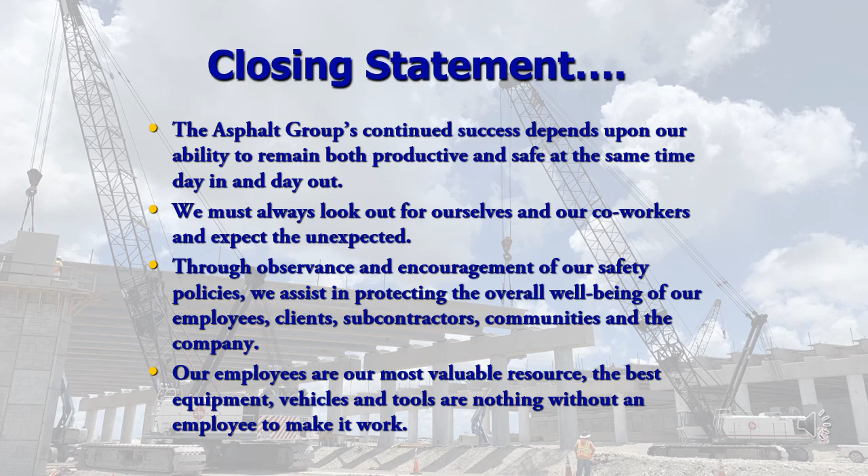The best equipment, vehicles, and tools are nothing without an employee to make it work. Remember to review and sign off on the orientation checklist. And once you get out to the field, make sure you are well rested each day and ready for work on time. Limit distractions while at work and stay focused.

Do not use your cell phone during work hours. Look out for yourself and your coworkers at all times. And if you see something hazardous, say something. Don't wait. And welcome to the team.